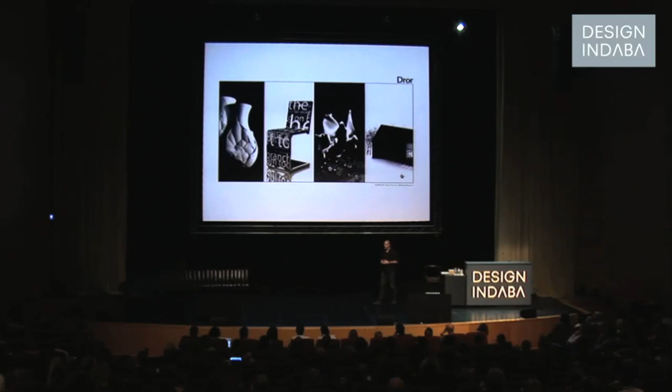I run a design studio in New York, and we practice cross-disciplinary design, from product to architecture, art direction and interior. We really have no idea what we're doing every single day. We're basically reinventing ourselves every single day. And actually, that's the beauty.

When I started my practice 8 years ago, I kind of wished that we'd be able to say, this is one of our hotels, this is a chair that we've done. Today, I actually wish that every project will be new, unique, and different, because my main interest is in innovation.

I'm going to be speaking today a lot about different scales. I'm going to run through a few projects that are in really different scale. But first, my passion is in transformation, where physics and poetry meet primarily. I'm going to be speaking a lot about collapsibility, about the need to work from physics, from our actual physical need, and also about our emotional need.

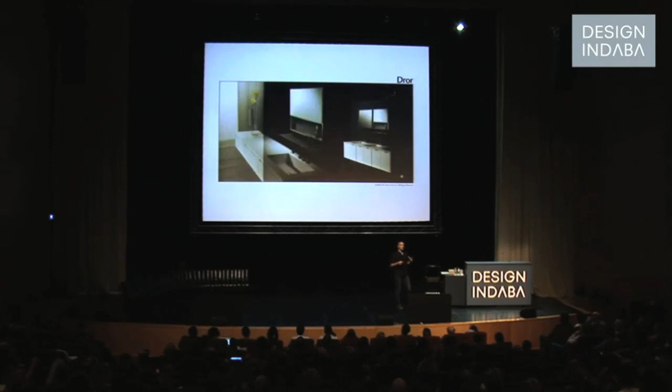So the first project I'm going to be speaking about, and actually a couple more seconds about the studio. We're a very small design studio in the center of Manhattan, and we really learn how to, every time, bring the knowledge that we're lacking, bring consultants and different collaborators to work with us, as we really play with creativity, with a lot of different materials and form that we've never experimented with or worked with. So it's been a really interesting place.

Now, moving to New York in 2002 was hard. Was really hard, and I really felt like, how can I express this feeling that I'm having going home every day, trying to do what my passion is. I immediately pretended I'm we, and the studio was pretty much myself for quite some time.

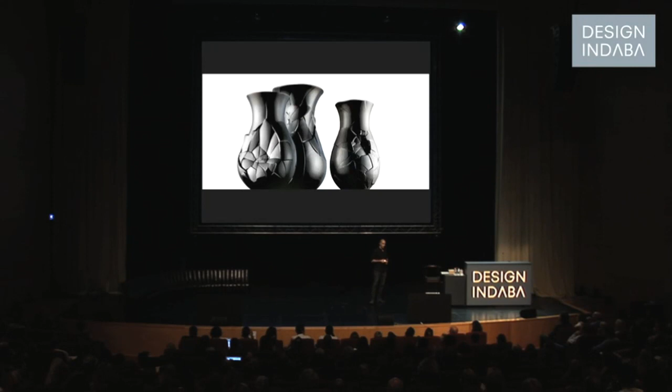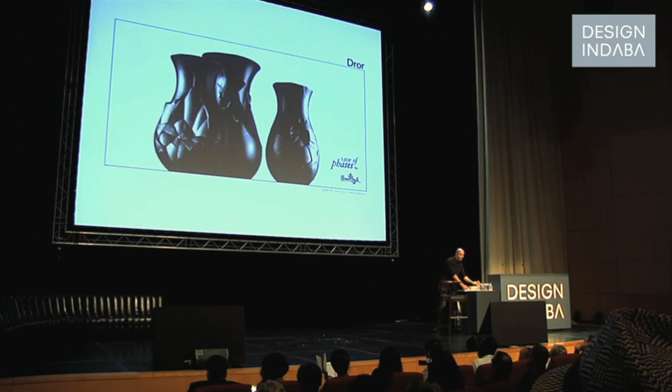This was my very first expression to really speak about my own feeling in New York, taking an iconic vase and breaking it and taking it into the experience of who we are, the experience that we go through. This is in production with Rosenthal for the past 5 years, and it's been very successful for us and for Rosenthal as an icon for who we are and the phases we go through, as a metaphor in a product. So this is, for me, always the icon for metaphorical transformation.

And the second project is, for me, the idea of physical transformation. Taking a folding chair out of the closet and actually letting it stand on the wall as an art piece, highlighting the beauty that when a guest comes to my environment, I don't pull a chair out of the closet that I'm not proud of, but I'm presenting it on the wall as an art piece, and letting him sit on my art. So here we start realizing that what we're playing with is the boundary between art and design, two-dimensional versus three-dimensional, practicality and aesthetic. And we realized that we actually just created a canvas with hinges.

So we started collaboration, and we've been doing all kinds of different collaborations. The first one was 100 Years from Mondadori, a publishing house in Italy. And this one is a clear version that we debuted on top of the Rockefeller Center in New York, tracing the view of downtown Manhattan and adding some vision of additional buildings as an installation for the debut of this project. It's been a really fun collaborative effort that highlights this idea.

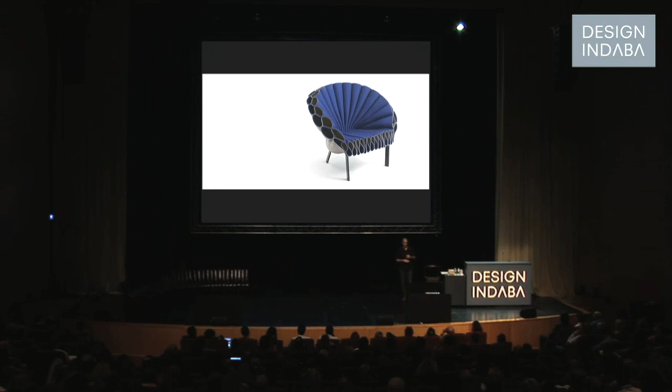This is a project we've done for Cappellini. One of the smartest pieces of advice I heard from somebody was that when you merge physical transformation together with metaphorical transformation, that's where the most interesting things happen. And I think we've done that here, taking felt that has no structural integrity to hold a person in its typical state, but by folding it on a very minimal frame, creating a structure with those folds.

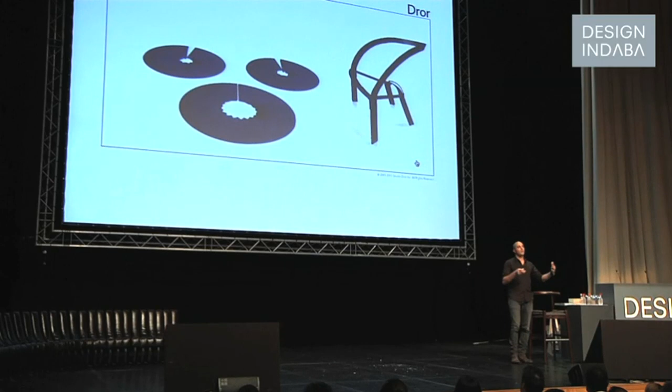The idea of a peacock was my inspiration, an animal that opens up his feathers for two completely opposing reasons, attraction and also defense, which plays with that duality that is highlighted in this collaboration with Cappellini.

Architecture was something I had no formal knowledge of, no school training. One day I found myself wondering what it would be like to take some of my ideas into a larger scale. I'd been talking about cross-disciplinary work as a studio, and architecture came a little later on.

I found myself sketching an A-frame house in my sketchbook, wondering why every kid draws an A-frame house. What's the significance of this icon in terms of structure? I realized there are a lot of places with four seasons, a very cold winter which needs a pitched roof for structural load, but in summer, can I change that icon because I don't need a pitched roof?

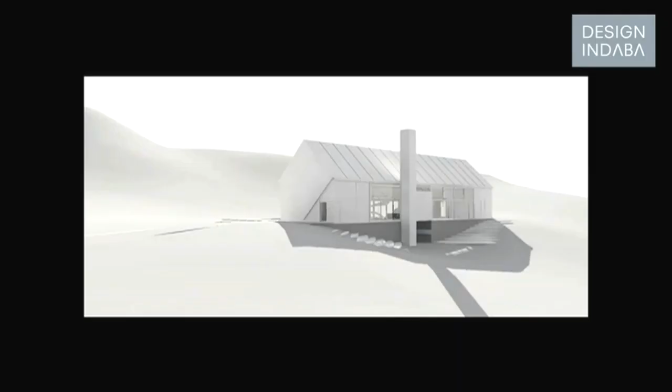So we thought about creating a hydraulic system that works just like a garbage truck, with two hydraulic pistons. We liked the idea of changing the icon, and very quickly realized we could also change the program of the house.

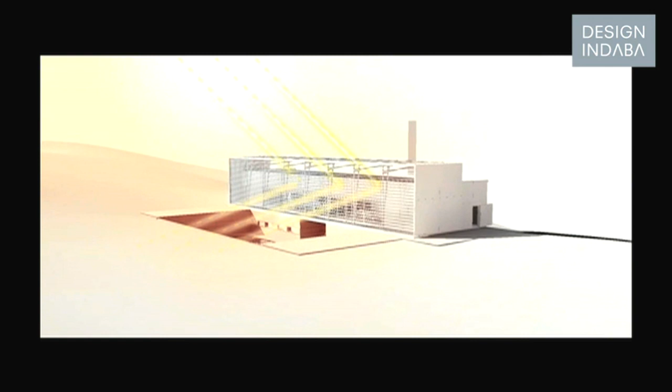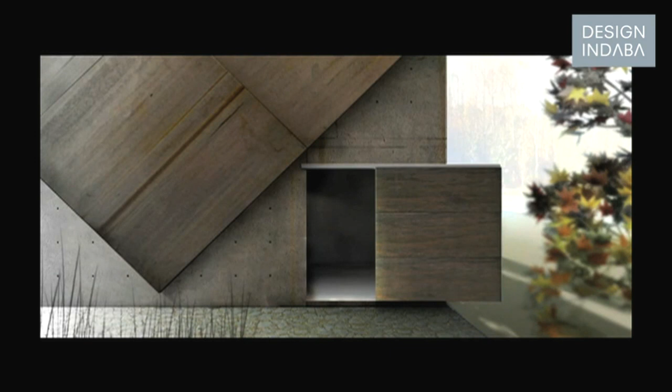Later we realized the sun is very different during summer and winter, so we could take advantage of the higher summer sun, where the gap creates a wind tunnel through the structure. In winter, because the sun is lower, it can penetrate in and warm the house, utilizing this movement as an ecological system.

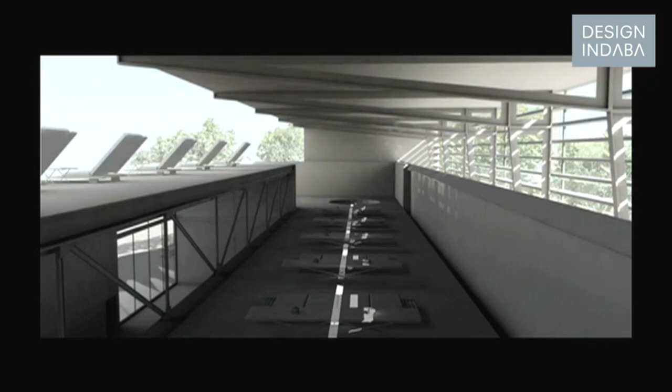That very first project was exciting for me because it was the first time I took what I call transformation into an architectural scale. So we started building a portfolio of architectural projects and presented it to some clients and potential developers.

Very quickly we met an interesting client in Abu Dhabi who commissioned us for a short six-week conceptual study. I showed them my vases, my chairs, other work, and some conceptual architecture, and they said, we have 135,000 square meters of land off the coast of Abu Dhabi—come up with an idea.

So I found myself, for the very first time, looking at what's called a master plan. I naively thought, okay, the hotel should be here, the residential should be here. The brief was simple: fit as much luxury housing as possible onto this island, with a hotel to service those residences.

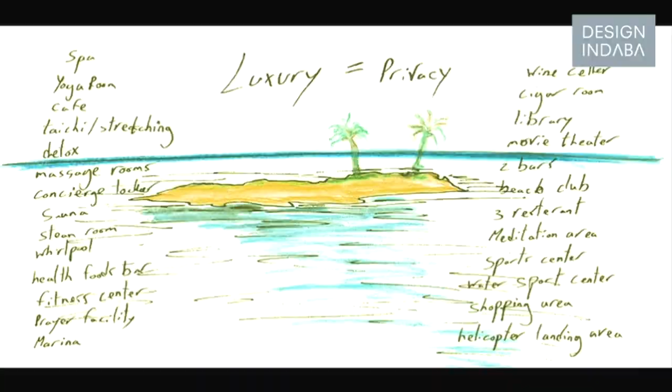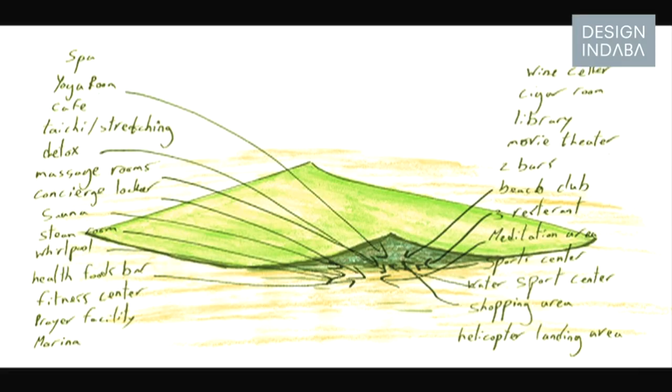I realized, who would want to buy a house and see sixteen neighbors to the left and fourteen to the right? I thought luxury, in that setting, is really all about privacy. I wanted to camouflage everything so you'd feel like the only one on the island—thinking about the Persian Gulf, where we always say lift the carpet, shove everything underneath, and hide it. That became the conceptual direction for the entire project.

So I said, why don't we create this large, massive architectural carpet that covers everything, covers all the residential, and becomes a roof that is also your garden.

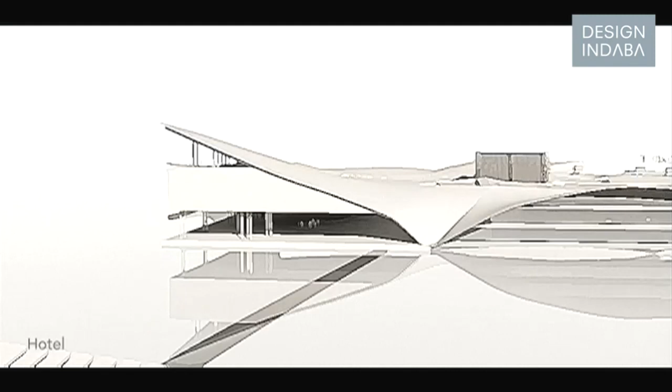We started building this program, and it was really interesting because a lot of what we work on, whether we get a brief or design without one, we always try to put a question mark next to everything and ask, just what if? And play like kids, very naively. So this project started like this.

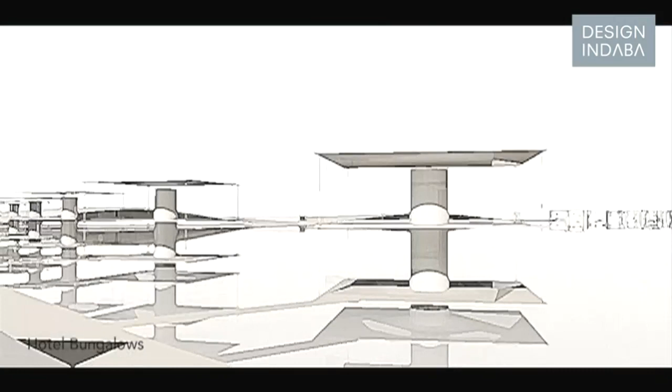We ran that program into basically everything: the hotel, which has adjacent bungalows sitting on a center column that becomes a spiral staircase opening to the horizon, and every villa on the land has its own unique shape, its own private beach, and the roof really becomes the garden.

So you have moments where the carpet opens up and reveals different things, letting light come in, also playing on the underside of the carpet with the ornamental motifs of that region, with the view always towards the horizon.

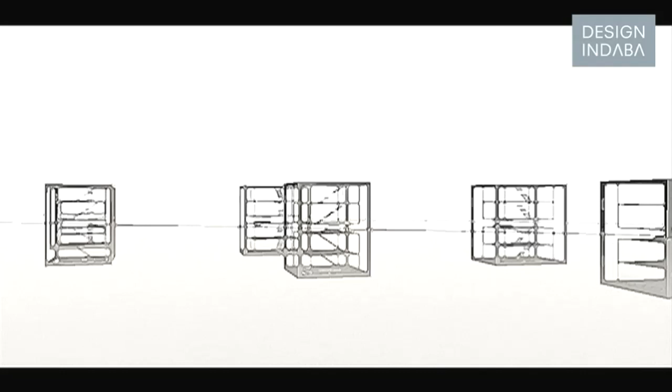Then playing with water villas—the brief called for villas on the water and villas on land, and I thought, instead of holding those villas traditionally from underneath, can we actually hang them from the roof? They'd be suspended with bridge cables so there's no column grid inside, playing with the strength of a square inside a square, creating four triangles.

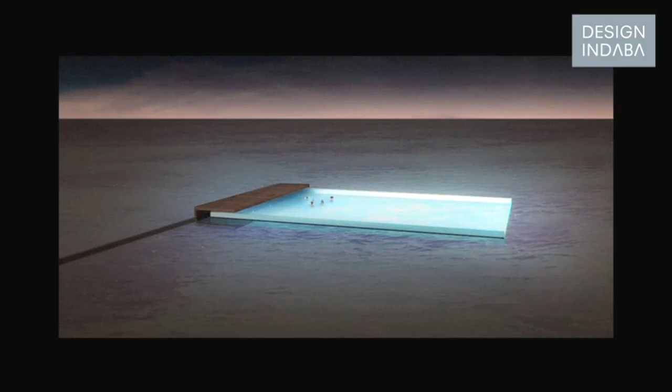So that was the approach for those villas. Then really realizing that the climate in Abu Dhabi is extremely hot, and the water sometimes is not as pleasant to bathe in, creating those pools that appear as ice cubes, basically floating in the water at a different temperature. Then another really interesting challenge I never thought about in design, which is high tide and low tide, which in this region is about 1.2 meters or so.

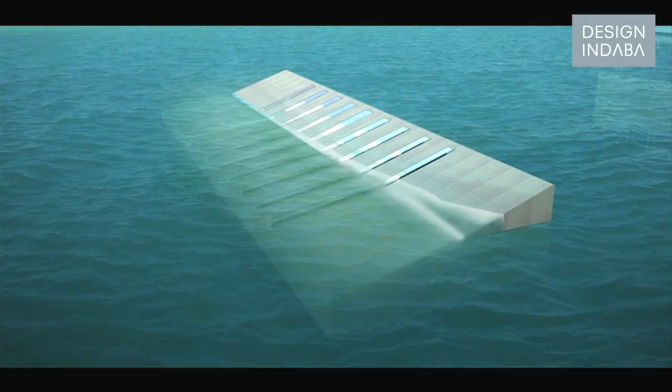So I proposed this building that plays with the highest point of the tide and the lowest point of the tide being the two points of the roof of this underwater spa. When you're inside, the building is oriented in the direction of the waves, so when you get a massage, the building gets a massage as well, changing the amount of light that comes in throughout the day.

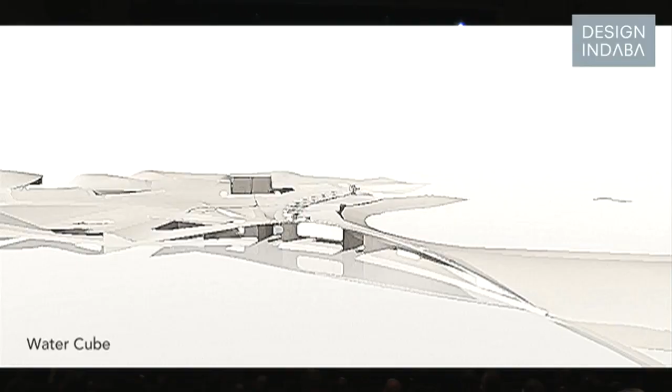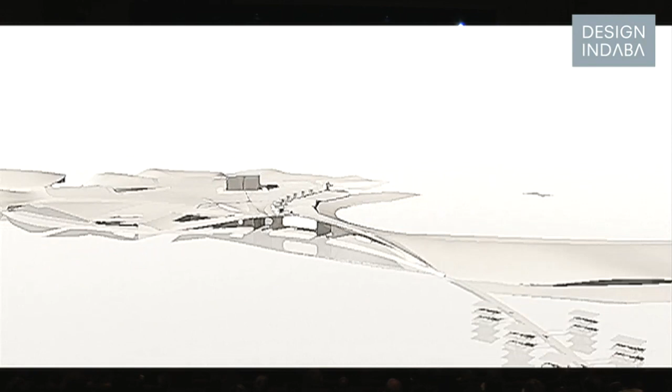The last part we presented on this project was what we call the water cube. It's the only building that actually sits on top of that carpet. It is constantly covered with running water. Only when you approach it from those four wings on each side does it actually pitch open and reveal the structure, letting you enter with a very simple motion that lifts the carpet of water and lets it glide to the side.

So we sent this presentation after 6.5 weeks. We got a phone call back a week later saying the Crown Prince of Abu Dhabi saw your presentation and he wants to build it.

That was exactly... Thank you.

I laughed hysterically for about a minute on this call. I just could not stop laughing. And they were quite serious, seven guys on the phone, and I just laughed. I said, if the client was Walt Disney, I would approach it the same way. I didn't really think about whether we could build it, or whether it was the right thing to do. I didn't even think about all those titles of the engineers who came a week later to my studio—dredging engineers, marina engineers. I just thought, okay, I'm going to go into the meeting and say I'm not an architect by training, and this is my vision—can we build it?

This was the very first time I realized that you can actually do whatever you want in Abu Dhabi. It's one of the only places you can work like that.

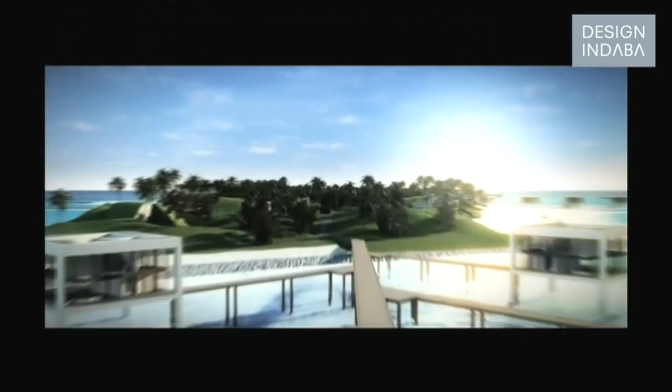This project, which is actually being built right now, which I'll get to in a second, is actually very green because of those green roofs and using the gray water that you're using to actually water your gardens.

6.5 months after we were given the commission, they basically wanted us to design all 65 residences. I start laughing again.

They said, we know you've never done a project of that scale before, and we need to pad you with the knowledge that you're lacking—a sentence I've kept repeating since, because this is exactly what creativity is about for me: putting the knowledge aside, like Michael was saying, and actually thinking like a kid, really seeing if something is possible, and then bringing the knowledge in to validate that.

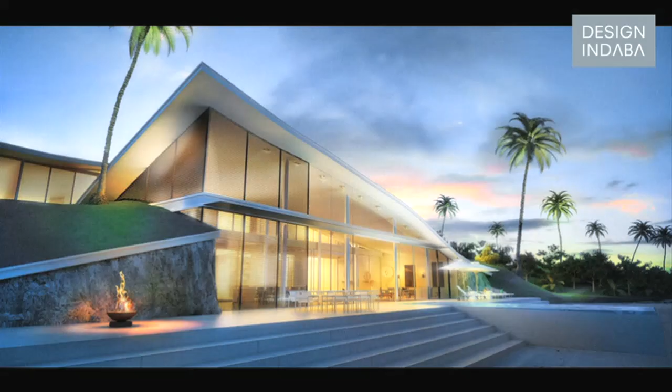So we opened the sales office on the island 6.5 months later, and with this material, 72 hours later the project was sold out—all 65 residences. I always say they were actually more successful than Avatar on its first weekend.

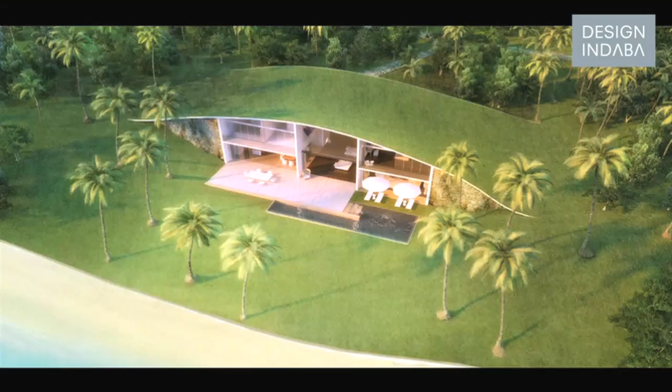And this is just a few images of the architecture. There are two different types of houses: one directly on the beach, and one that is a little bit recessed.

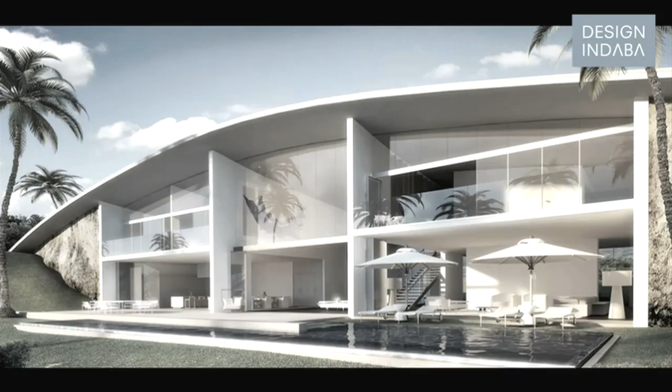And the one on the beach is kind of a two-story design—I passed it too quickly. The second one is a bit recessed, which you actually enter from the second floor, because it follows the shape of the island.

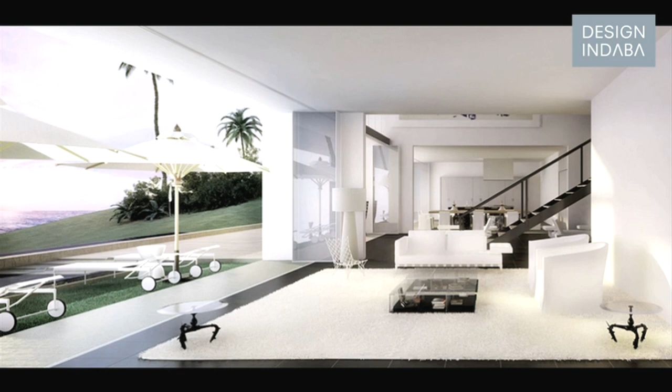But what was really interesting is the dramatic view you get when you enter, as the layers in front of you go from the horizon line to the beach to the pool. And then the water villas, which are pretty much as we envisioned them—a rotated cube inside of a cube, for strength.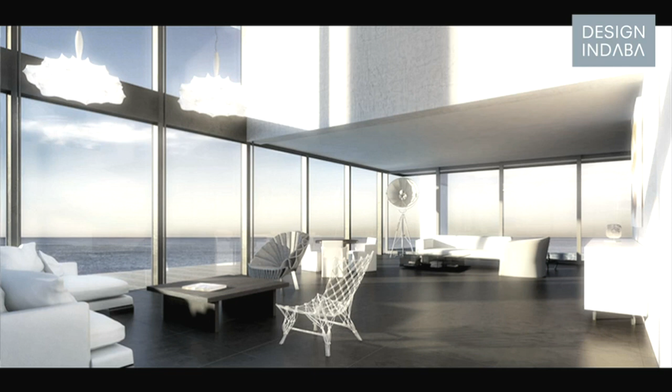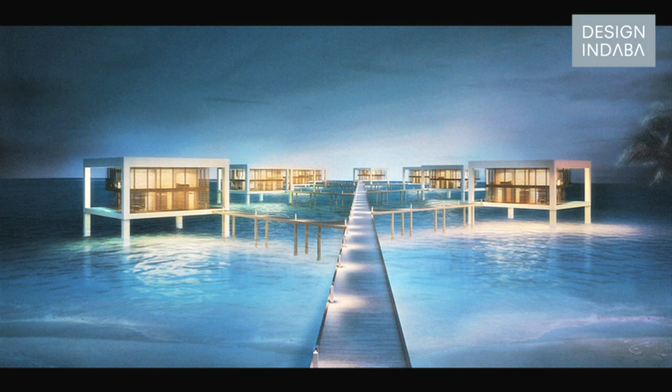I learned something really interesting with this project: if you can communicate a concept with one word, that word can stay and remain. The idea of a strong concept can maintain itself. Every time somebody mentioned we need to have this equipment on the island, the question was where should we hide it, where is the carpet, how is the carpet going to cover it? So 'carpet' became the word used all along, and it really made this project grow.

The project is scheduled to be completed by the end of the year, and that's the first villa completed. Here are a couple of other visuals of what this project has looked like over the past few months.

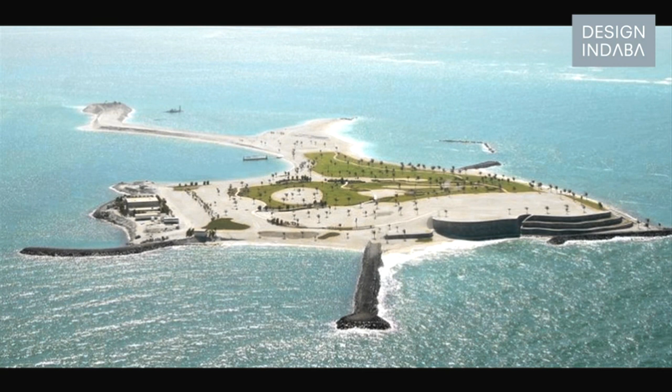So how far can an idea go? That's actually the start of my second part, which is what we call a QuaDror.

I'm going to take a second to breathe here, because I've been really waiting for this day of debuting this project. It's been 4 years of working on this without really sharing it, except with some engineers and people who brought us knowledge. So I'm going to talk about how we got to this whole thing, what it became, and what we're trying to actually do with it.

It all started 4 years ago when we were working on a project for Swarovski. With that project, all I tried to do is intersect two squares into one another in a way that the squares are exactly the same. I realized you can either have an internal square, an external square, or something with some kind of chopped corner.

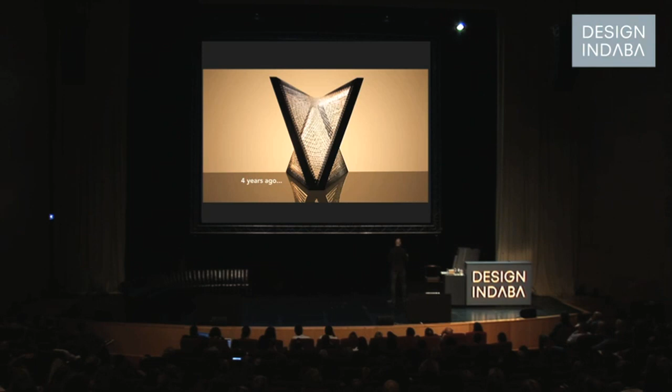But I start cutting pieces, and yeah, okay, I'll take those now. I'll take them now. Thank you. Actually, I need to start with that. Yeah, thank you.

What we tried to do is intersect two squares into one another, at this point purely for aesthetic purposes. I realized that if we take 4 L-shapes that are exactly the same, and I'll repeat this here, and put them together in such a way that they create this yin-yang form - let me do it with those bigger pieces, let me break them apart - so, a little larger model.

So it started really like this: taking 4 identical shapes, placing them in such a way that they create this square yin-yang, next to each other. Then 2 more sitting facing - let's call this facing down, and those facing up - in such a way that they form that kind of geometry. And by connecting one piece to the opposing one...

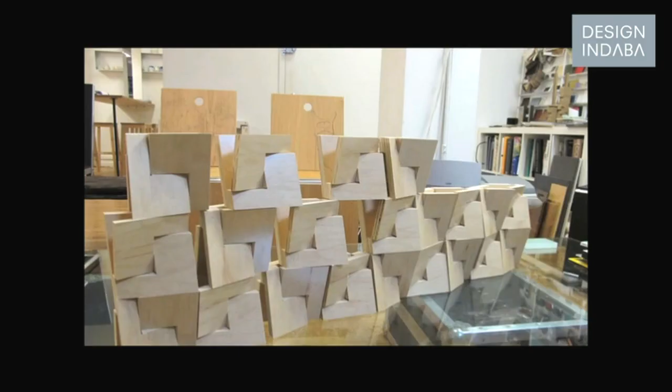We realized that there are a lot of different products that need structural strength - products, and then of course larger scale products that need structural strength. So we've divided what we've done into 4 categories.

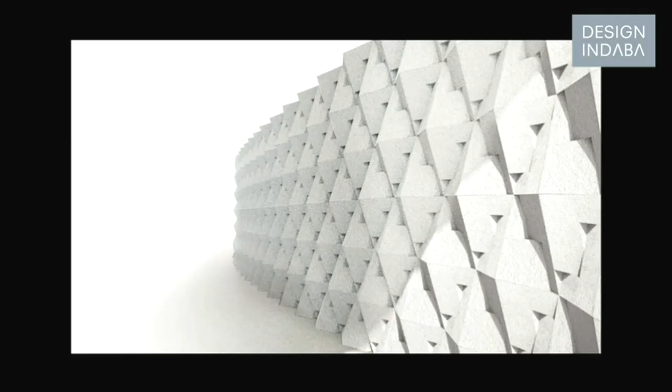The first one really focuses on the solid panel - basically what we call a new type of building block. This is the same thing at a smaller scale, but you can see, take this down, how easy it is to make a wall that can stack with no additional fasteners, out of a pile that size into, in this case, 6 meters by 2.5. Then we realized this can become all kinds of walls.

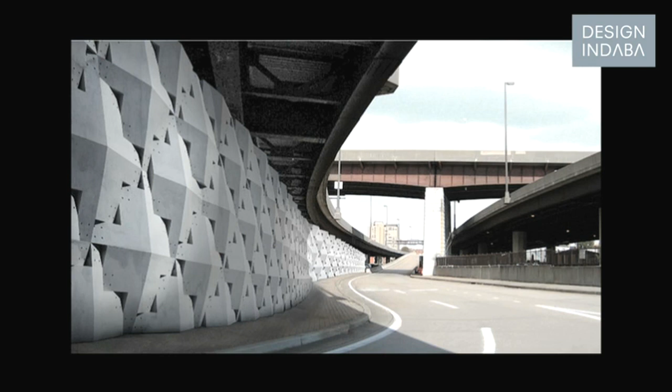Is there any type of additional advantage but speed? We realized that one of the biggest advantages is actually the acoustics that this geometry creates. So now we're actually working on highway walls with this geometry, as a sound barrier, because of the acoustics and the ability to construct this so simply out of one identical L-shaped mold.

Which of course means that if we're not stacking 86 pieces on top of one another, there's just wasted energy, which means those pieces can be a lot thinner. Already in this state, they are saving quite a lot of material.

I'll be talking a lot about energy efficiency in design in general, because at the end of the day everything is about energy. But the strength of this shape, as we know it today, is very much comparable to the same strength of a block, or almost the same strength of a full block of that size, with just 20% material. So obviously a lot of saving on material.

And really the reason, which I'll get to in a couple of slides from now, is triangulation—four triangulations that are always opposing to one another.

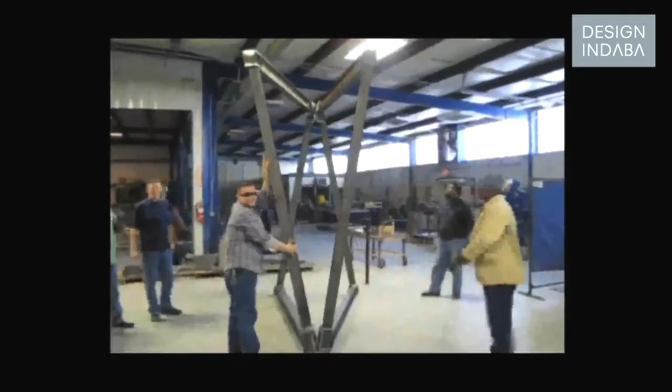And we start looking at a larger scale. So this is the first I-beam, kind of 12-foot by 12-foot structure that is able to actually lift by hand, and the huge advantage is that it's self-standing.

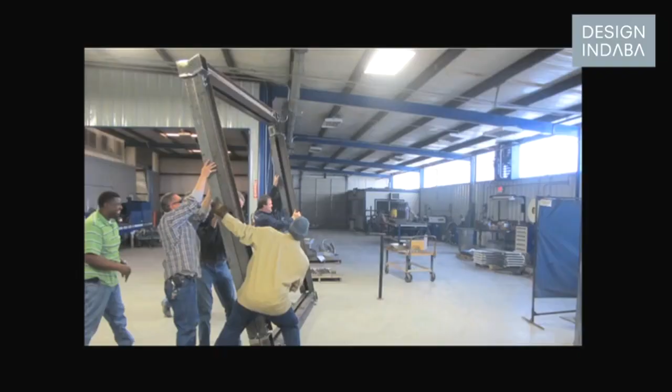This panel, as well as those pieces, actually has a 43 degrees of tipping point, which is pretty much like a solid block of that dimension, which is extremely solid.

So what are we doing with this? The ability to aggregate, the ability to connect pieces to one another, which is basically what got us into thinking in larger scale and about architecture right away.

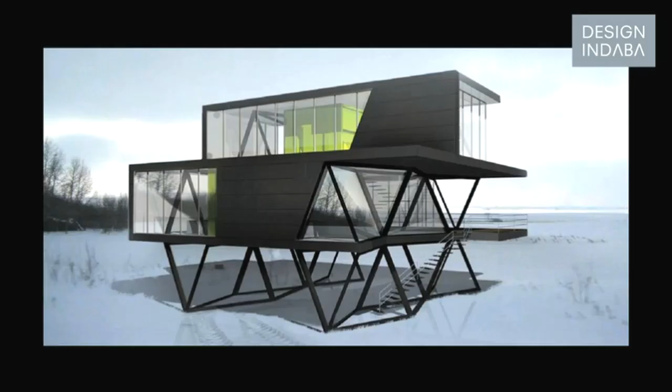And we start looking at Jean Prouvé and Buckminster Fuller and their vision for deployable architecture, or prefab. And we start looking at those possibilities, and we start realizing that one of the interesting things is that it's a frame. So the skin is separated, and it's just a bone.

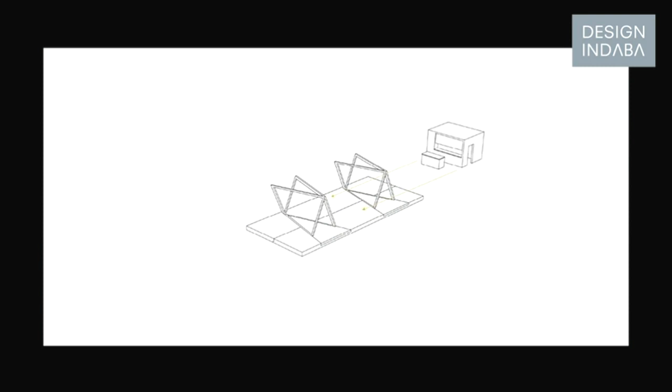So this house can actually ship flat, and the skin of the house really depends on the climate that you put it in. So you can customize it to the type of client by the need of the skin. So it comes as a flat pack, and comes like that. We're working on several different types of homes like that.

So the diagrid—Norman Foster has already proven that a diagrid is more beneficial than a typical grid construction, and this geometry as well is so far showing that we're probably saving about 30% on the amount of steel that we need to use.

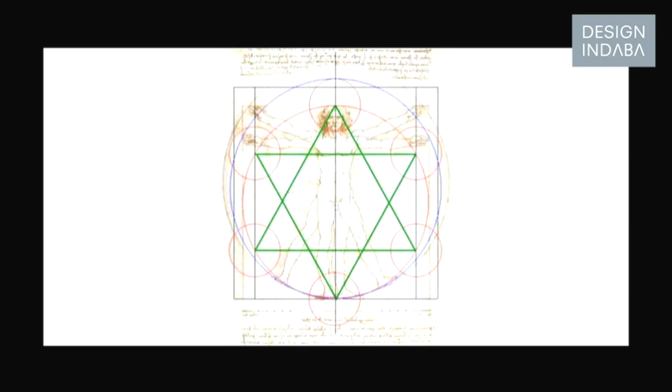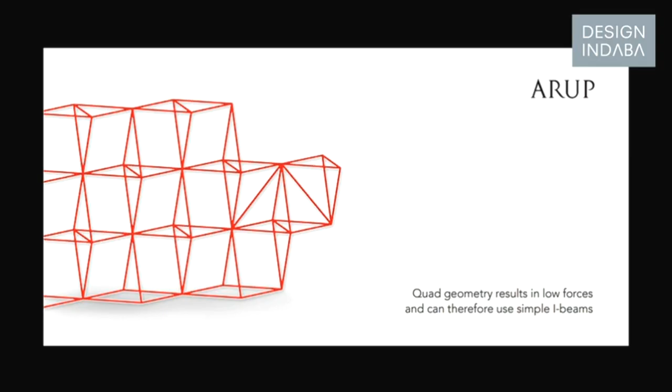The geometry—not going to get into the technical part so much—is really the ability to convert what Leonardo da Vinci sketched as a hexagon, and really create it in a way that it can open and close. So we actually hired Arup to help us with this engineering, because not myself or anybody in the team could.

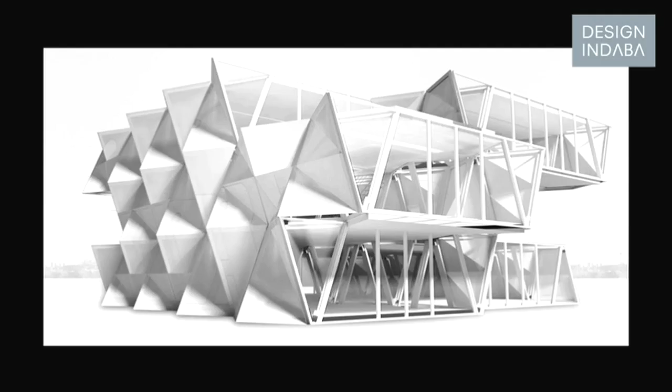And this is the kind of information that they provide us: the ability to aggregate, the ability to cantilever, and actually see how those things can connect. So we're working on all kinds of different deployable architectural structures at this scale.

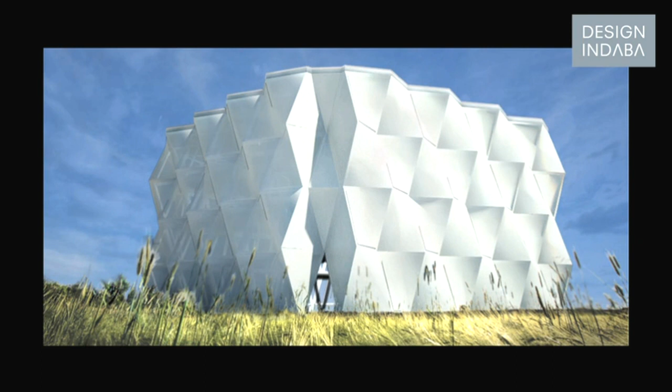And this is actually a concept that we've worked on for Cape Town. It's made out of identical pieces. So the next part that we realize is that if you use typical members—just I-beams and those unique corner pieces—

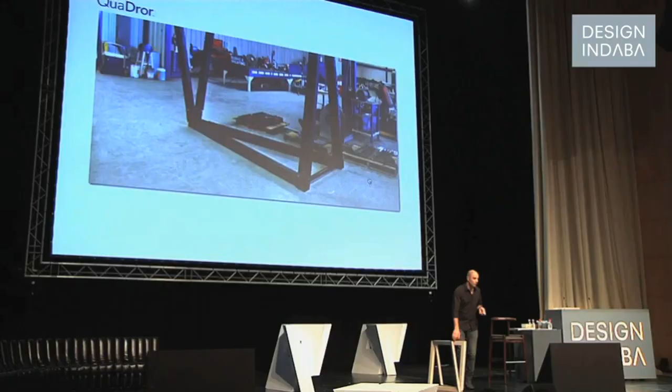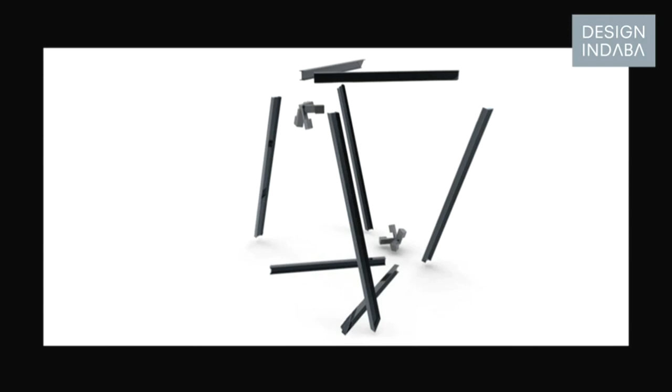What if we can really approach all kinds of different conditions, like disaster relief and all kinds of need, with very little material and actually utilizing what's available? So this is obviously done with just I-beams and those corner pieces.

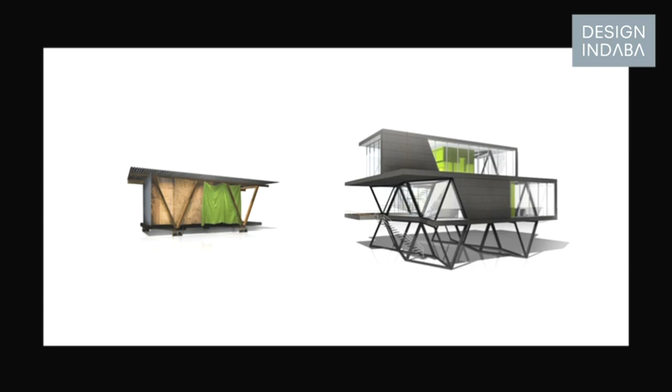But then we looked at structural strength at different scales. And as we work at different scales, we constantly do that, and we start looking at whether this house can support in exactly the same way as the larger houses.

So we start researching and realizing that over 1 billion people today live in slum-like conditions, and the biggest problem that we wanted to address is the structural strength of their homes as an improvement.

There's not a lot of organizations actually working on improving the homes, the personal dwelling, because how do you start addressing such a large problem? So you're working on schools first, hospitals, and so forth. But what if we can take this geometry and actually just improve the structural strength?

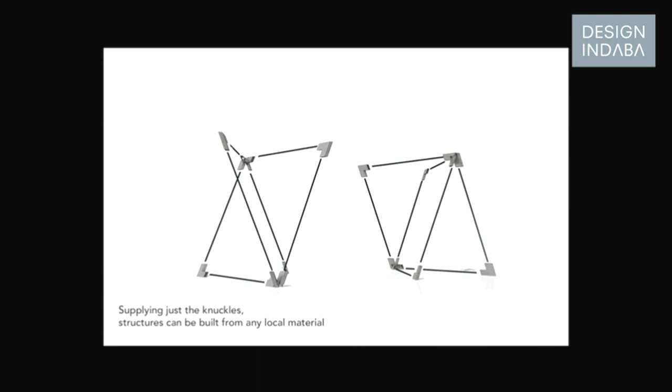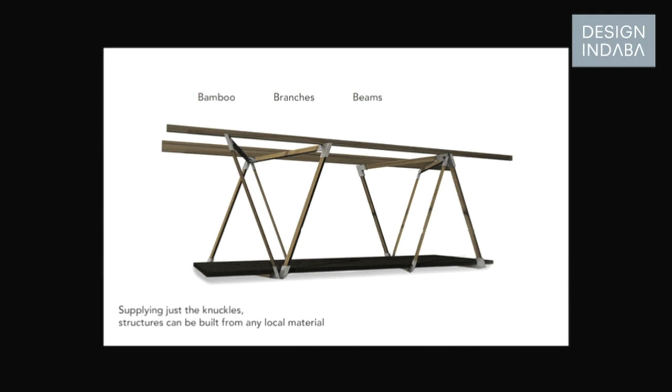So we're looking at what we call today a universal kit of parts, just the corner pieces, that is able to attach to all kinds of members—bamboo, branches, dimensional lumber, and others—just to create the geometry. And basically the skin is whatever you have available locally.

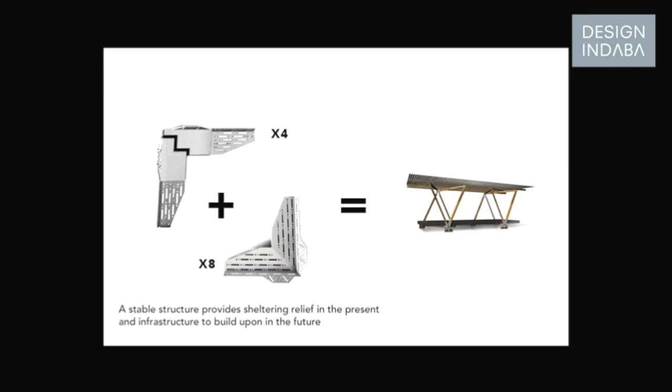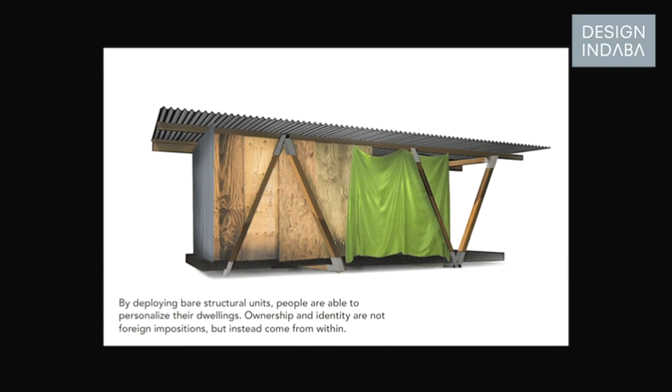We're engineering this right now, and actually going to build the first one next week in New York, of all places. But really, the idea is that it's not foreign to the culture, and it's not different. It's really something you also have ownership over because you've built it yourself, and it's so easy to just pick it up from the ground flat and lift it, and it opens up and creates this geometry.

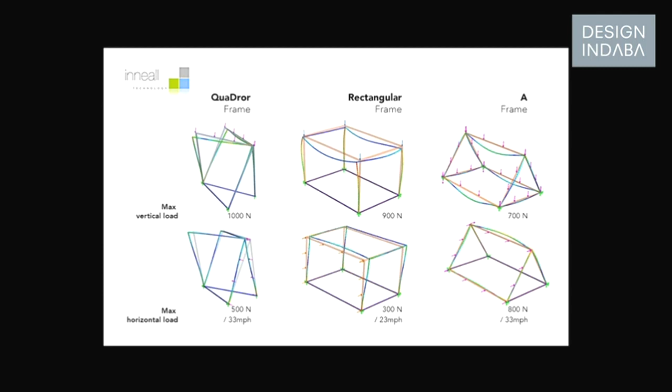So just another slide about structural strength, comparing a typical rectangle and an A-frame, which are the two basic forms, putting them in a simple software to understand the vertical load and the horizontal load, and how much stronger two of those units side by side are.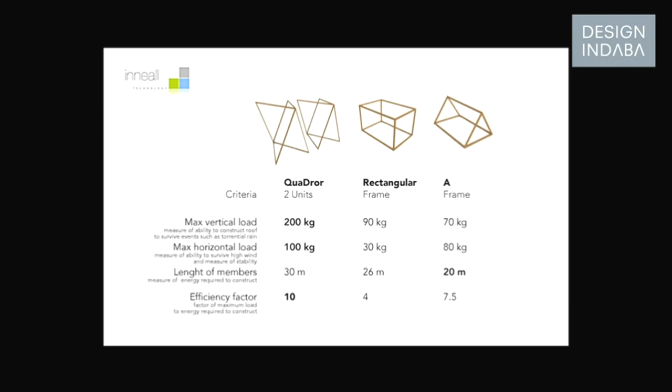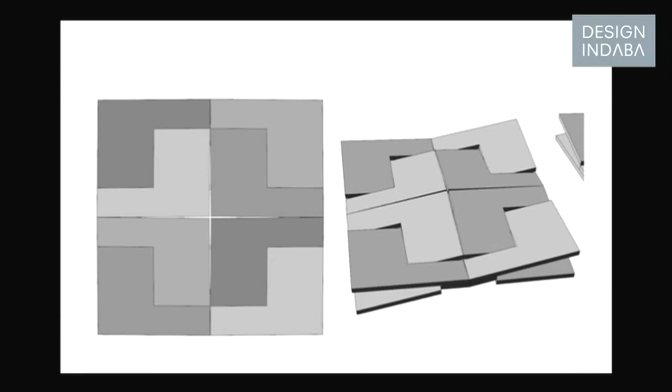And of course, for the kit, the ability to stack 1,750 kits in one container that can actually help 1,750 homes in just one single 40-foot container is really the focus.

So there's endless possibilities, and the way we're setting this up right now is that we understand we will not be addressing all of the challenges that this type of geometry can provide. So we're basically saying this is a call for collaboration. We want to help utilize this in all kinds of different cases, and we are obviously open to hear the different structural challenges that companies and philanthropic organizations have, and work with them.